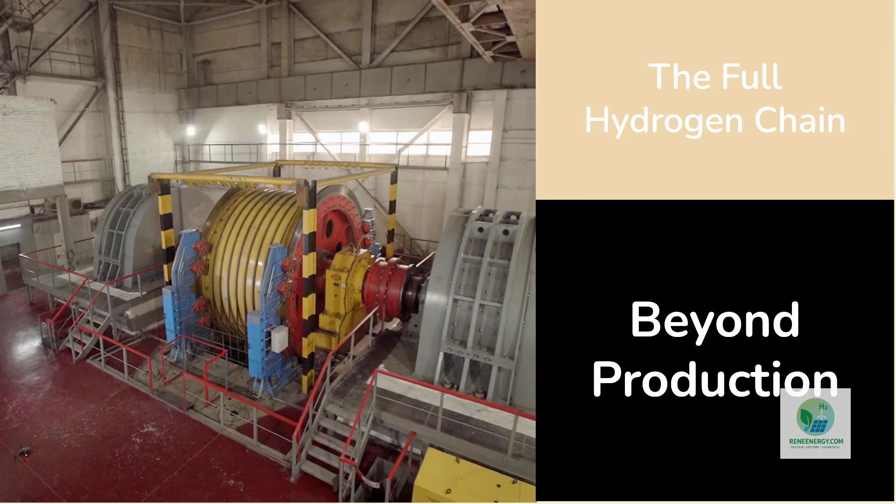And three companies, Siemens Energy, Linde, and Shell, are quietly building the pathways that allow this molecule to move. This is where the real story of green hydrogen begins. Not at the electrolyzer, not at the solar farm, but across the entire chain that connects them. Because hydrogen is not valuable when it is produced. It is only valuable when it is delivered, stored, transformed, and used. And that journey is where most projects fail.

Start at the beginning of the chain where renewable electricity is generated. Wind farms in Northern Europe, solar fields in the Middle East, and hybrid renewable clusters in Australia are producing massive amounts of electricity at increasingly low cost. This is the first critical condition. Without low-cost electricity, green hydrogen cannot compete. But even when that electricity is available, it does not automatically translate into hydrogen production.

It must be converted. This is where Siemens Energy enters the picture. The company has positioned itself not just as an electrolyzer manufacturer, but as a systems integrator. Its role is not simply to split water into hydrogen and oxygen. It is to connect fluctuating renewable electricity to stable hydrogen production systems. That sounds simple, but it is not.

Renewable energy is inherently variable. Wind speeds change, solar output drops at night. Electrolyzers, however, operate best under stable conditions. So the first hidden challenge in the molecule's journey is temporal mismatch. Electricity is intermittent, industrial demand is continuous. Siemens Energy's systems attempt to bridge this gap through power electronics, grid integration, and dynamic operation strategies that allow electrolyzers to ramp up and down without damaging efficiency or lifespan.

This is not just an engineering problem, it is an economic one. Every hour an electrolyzer is not running reduces its utilization rate, and utilization rate is one of the most important drivers of hydrogen cost. Now imagine the molecule being created. Water enters the system. Electricity passes through the electrolyzer stack. Hydrogen is produced. At this moment, many narratives about green hydrogen would suggest the job is done. But in reality, this is where the complexity begins.

The hydrogen produced is not immediately useful. It is a low-density gas. It must be compressed, stored, or transported. And each of these steps adds cost, energy loss, and infrastructure requirements. This is where Linde becomes critical. Linde is one of the world's largest industrial gas companies, and its expertise lies not in producing hydrogen, but in handling it. Compression, liquefaction, storage, and distribution are the domains where Linde operates. These are often overlooked in public discussions, but they are where a significant portion of project cost and technical risk resides.

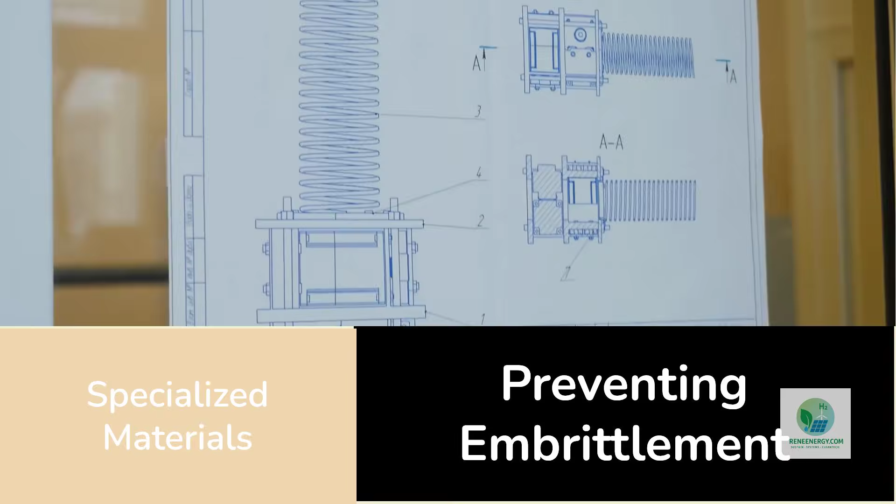Take compression, for example. Hydrogen must often be compressed to pressures of 350 to 700 bar for storage or transport. This process consumes energy. It also requires specialized materials because hydrogen molecules are so small that they can permeate metals and cause embrittlement. This means pipelines, valves, and storage tanks must be designed specifically for hydrogen, not simply repurposed from natural gas infrastructure.

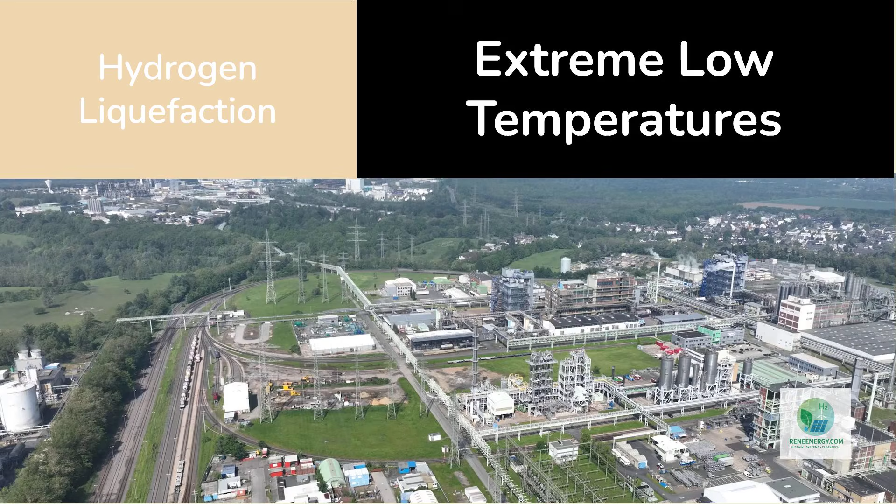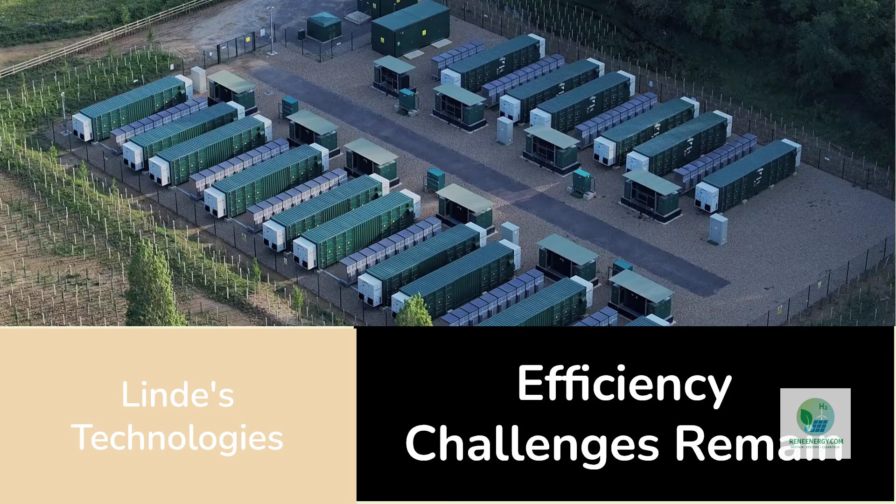Then consider liquefaction. To transport hydrogen over long distances, it is often converted into a liquid at extremely low temperatures, around -253 degrees Celsius. This process is energy-intensive, consuming up to 30% of the energy content of the hydrogen itself. Linde has developed advanced liquefaction technologies to reduce these losses, but the fundamental challenge remains. Every step in the chain reduces efficiency and increases cost.

Now the molecule moves further along the chain. It leaves the production site. It enters storage or transport systems. It may travel by pipeline, truck, or ship. And eventually, it reaches its destination. This is where Shell comes into play. Shell's role in the hydrogen economy is not limited to production. It is building integrated systems that connect production, distribution, and end-use applications.

In places like the Port of Rotterdam, Shell is developing hydrogen hubs where renewable electricity is converted into hydrogen, which is then used for refining, chemicals, and heavy industry. This is where the molecule finally becomes valuable, not as hydrogen itself, but as a substitute for fossil fuels in industrial processes.

Hydrogen can replace natural gas in ammonia production, reducing emissions in fertilizer manufacturing. It can be used in refineries to produce cleaner fuels. It can power fuel cells in heavy transport applications where batteries are less practical.

But even at this stage, the system is fragile. Demand must be synchronized with supply. Infrastructure must operate reliably. Contracts must be in place to ensure long-term offtake. This is where many projects face their greatest challenges.

The hidden reality of the green hydrogen supply chain is that it is not a linear process. It is a network. Each component must function in coordination with the others. If one part fails, the entire system is affected. For example, if renewable electricity prices increase, hydrogen production costs rise.

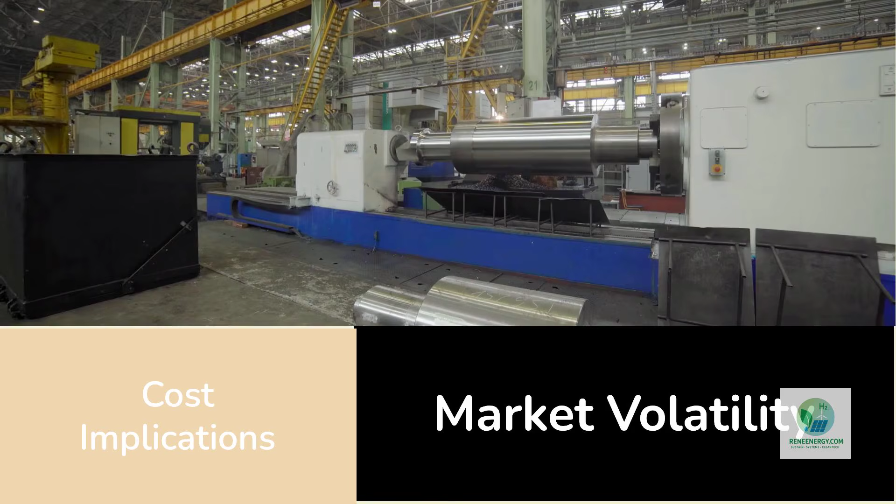If electrolyzer utilization drops, capital costs are spread over fewer operating hours, increasing the cost per kilogram of hydrogen. If transport infrastructure is not available, hydrogen cannot reach end users. If offtake agreements are not secured, projects cannot achieve financial close.

This is why companies like Siemens Energy, Linde, and Shell are not operating independently. They are forming partnerships, joint ventures, and integrated project structures, because no single company can manage the entire chain alone.

Now consider the system under stress. What happens if subsidies are reduced? What happens if electricity prices spike? What happens if utilization rates fall below expected levels? These are not hypothetical scenarios. They are real risks that developers must consider. Under these conditions, only projects with strong competitive edges will survive.

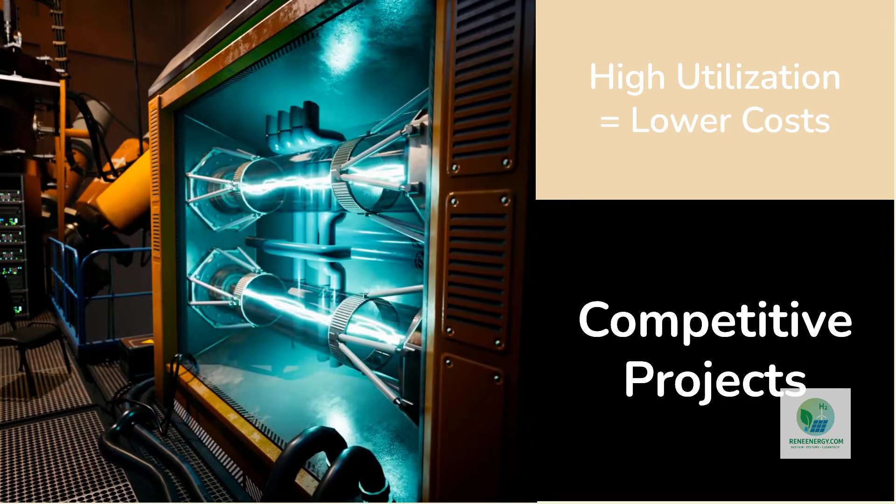Utilization becomes critical. Projects that can operate at high capacity factors will have lower costs. Cost of capital becomes important. Companies with access to cheaper financing can sustain longer payback periods. Demand lock-in becomes essential. Long-term contracts with creditworthy off-takers provide revenue stability.

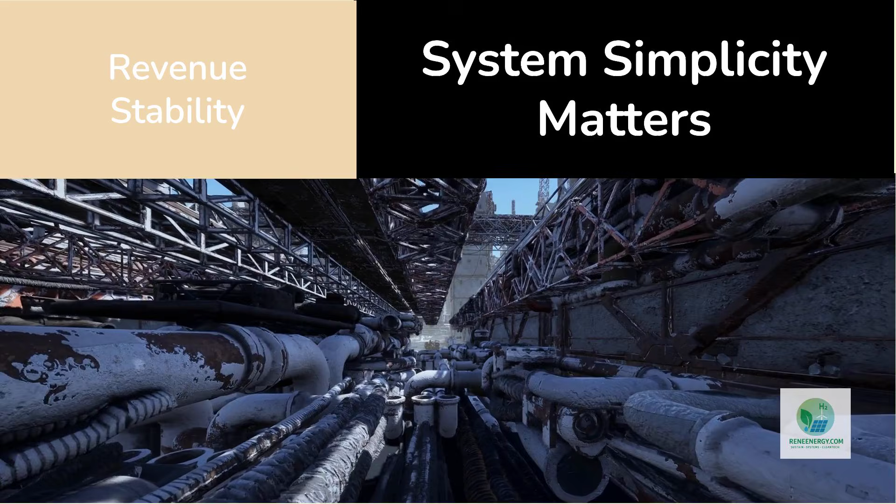System simplicity also matters. Complex systems with multiple dependencies are more vulnerable to failure. Projects that minimize integration challenges and rely on proven technologies may have an advantage. Time to deploy is another factor. Companies that can build and scale quickly may capture market share before competitors.

This is the competitive edge test. If subsidies disappear, if costs rise, if utilization falls, which projects continue to operate? Which companies remain viable? The answer is not always the ones with the most advanced technology. It is often the ones with the most integrated systems.

Now look at the future scenarios. If green hydrogen succeeds, it will not be because of a single breakthrough. It will be because entire systems are built and operated effectively. Ports will become hydrogen hubs. Industrial clusters will be connected by pipelines. Renewable energy will be directly linked to industrial demand.

In this world, companies like Siemens Energy will provide the conversion systems. Linde will manage the molecules. Shell will connect the system to global markets. And the value will not lie in any single component, but in the integration of all of them.

But there is another scenario. If these systems fail to achieve economic viability, green hydrogen may remain limited to niche applications. High costs, low utilization, and infrastructure constraints could prevent large-scale adoption.

This is why the current phase of development is so critical. Projects being built today are not just demonstrations. They are prototypes for entire industrial systems. The lessons learned from these projects will determine whether green hydrogen becomes a foundational element of the energy transition or remains a specialized solution.

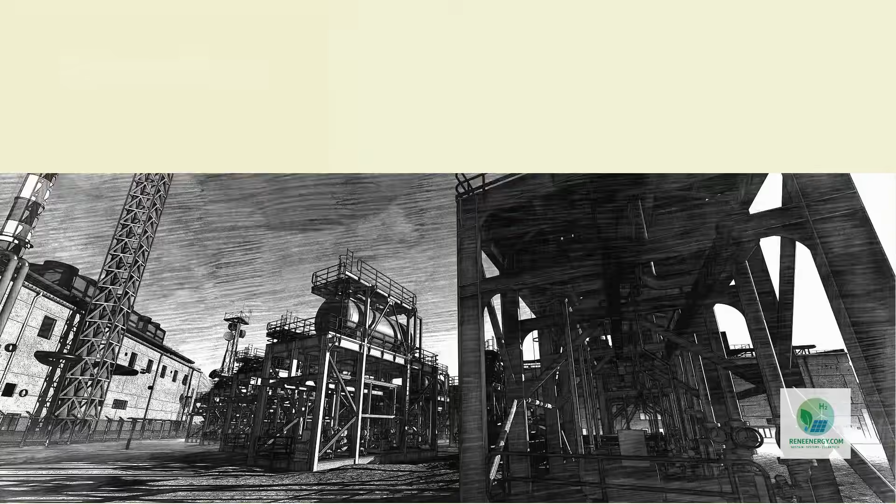Now return to the molecule. From the moment it is created to the moment it is used, it passes through a complex chain of technologies, infrastructure, and business models. Each step introduces challenges, each step requires expertise, and each step must be optimized to achieve economic viability.

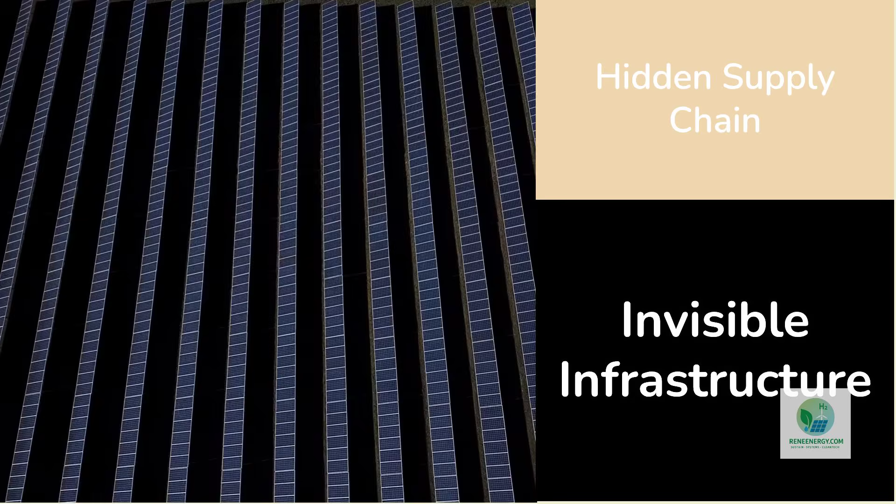This is the hidden supply chain that most people never see. It is not visible like wind turbines or solar panels. It operates behind the scenes, connecting energy systems, industrial processes, and global markets. And this is why the companies building this chain matter. Siemens Energy, Linde, and Shell are not just participants in the hydrogen economy. They are architects of the systems that will determine its success or failure.

If you are a developer, consultant, or investor trying to understand where the real opportunities and risks lie, you need to look beyond individual technologies. You need to understand the entire system.

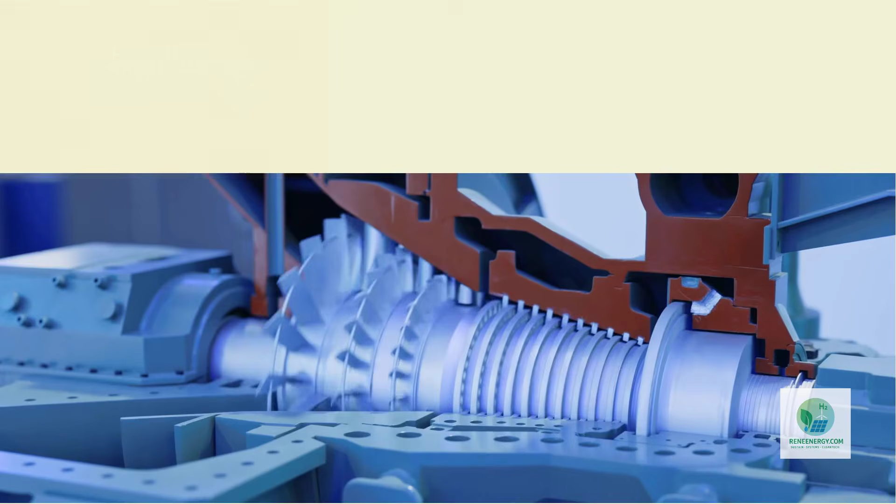Because in this industry, success is not about having the best component. It is about building systems that work under real-world conditions.